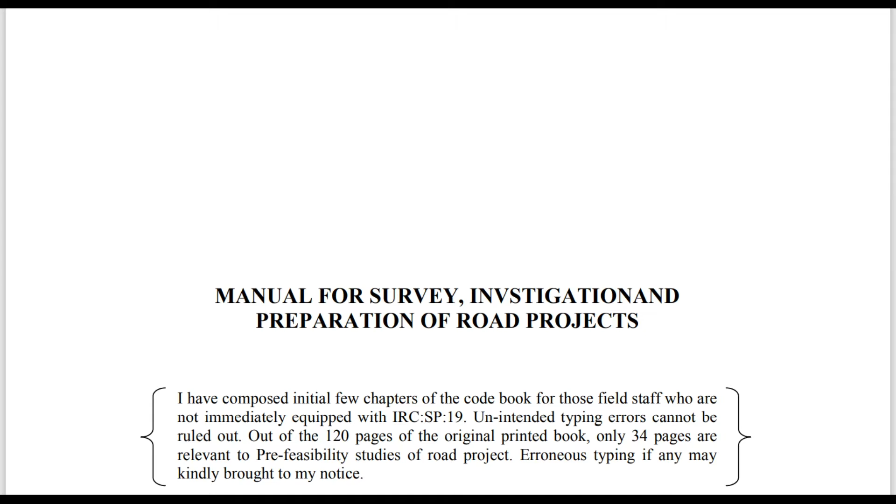तो आज हम बात करेंगे IRC SP 19 2001 एडिशन के बारे में। जैसे कि आप देख रहे हैं, ये IRC मैनुअल फॉर सर्वे, इन्वेस्टिगेशन एंड प्रिपरेशन फॉर रोड प्रोजेक्ट के बारे में बताएगा। बेसिकली जो प्रोजेक्ट रिपोर्ट्स थे उसके बारे में होगा ये। तो चलिए शुरू करते हैं।

इंट्रोडक्शन में 1.1 में बताया गया है कि हाईवे प्रोजेक्ट में क्या क्या इन्वॉल्व होता है। तो चेन ऑफ एक्टिविटीज, जो भी एक्टिविटीज जैसे एक्सकैवेशन या जो भी कंस्ट्रक्शन के लिए होंगे उसके बारे में होगा। फील्ड सर्वेज, अलाइनमेंट सेटिंग्स और ऑल दैट थिंग्स।

तो इंट्रोडक्शन में वैसे कुछ खास नहीं है देखने के लिए। 1.5 में आप देख सकते हैं कि इन्होंने मेंशन किया है IRC मैनुअल के बारे में, कुछ इनके जो भी चेयरमैन वगैरह सब आपको चाहिए तो आप 1.5 में पढ़ सकते हैं।

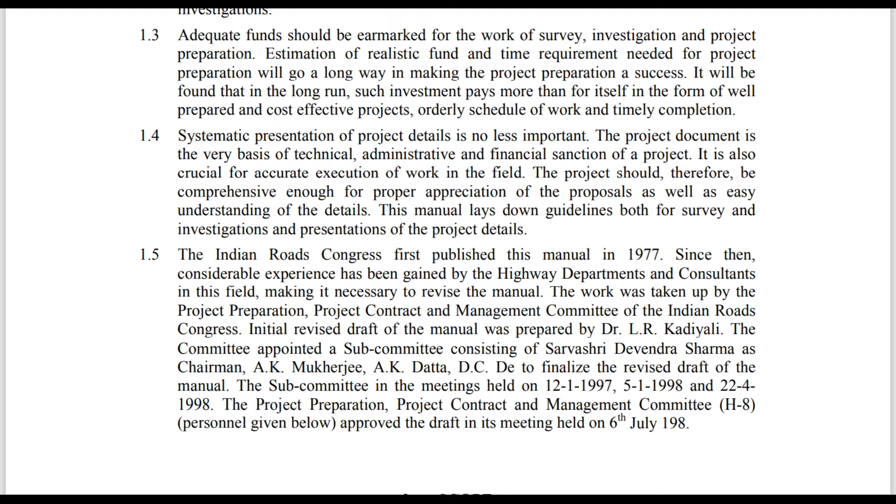सो हम डायरेक्टली बढ़ते हैं स्कोप की तरफ। स्कोप ये एक इम्पॉर्टेंट पॉइंट है, इसमें बताया है कि जो भी IRC मैनुअल SP19 है ये सिर्फ NH, SH और MDR के रूरल सेक्शन के लिए ही काम में आएगा। अगर आपको ODR या VR के लिए चाहिए तो आप IRC SP20 को रेफर कर सकते हैं।

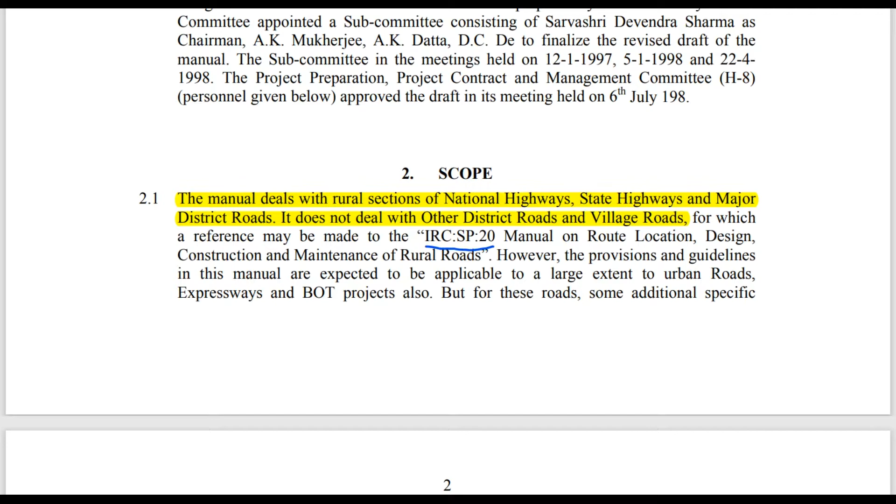Now I would like to share an interesting thing about the IRC. As you can see, IRC SP20 is written here, and similarly in the next slide you can see IRC SP54, IRC52. They have mentioned another reference IRC codes, because if someone is dealing with special conditions which are out of the scope of this current IRC, then they can definitely go through these IRCs mentioned as a reference and get details about it.

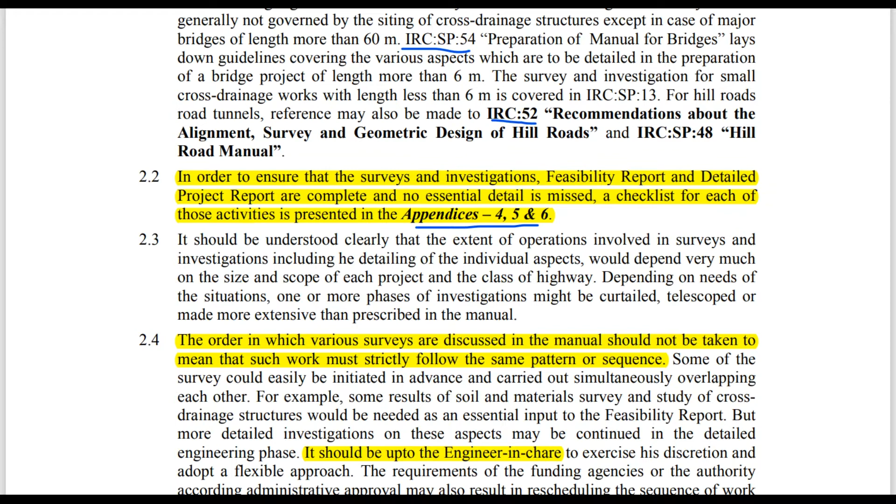In the next point, they have mentioned appendices 4, 5 and 6, which talk about the checklist for feasibility report and DPR. So now let's talk about point number 2.4.

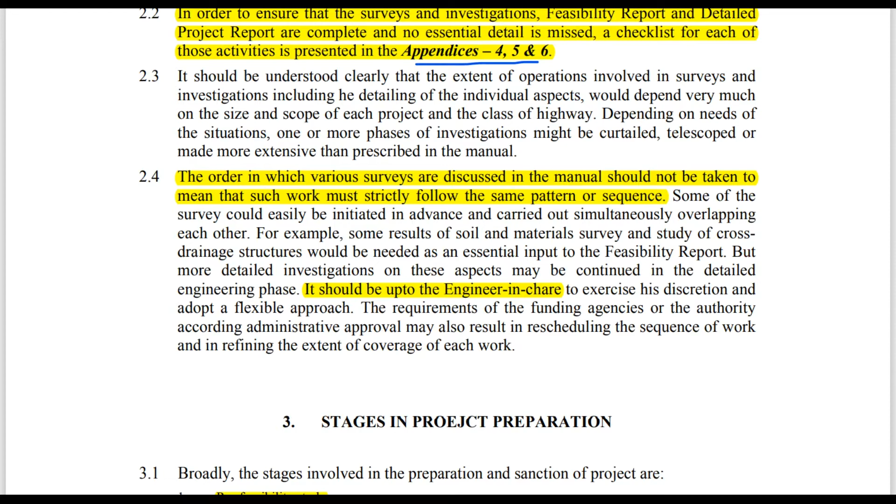In this they have mentioned that whatever the order of procedure they have mentioned, it is not compulsory that those will be followed in practice. It always depends on the engineer in charge, in which manner or sequence the order should be followed.

So now let's move to point number 3, which I must say is one of the important points, or the vital point in this IRC code. I will discuss this point in such a way that everything will be clear to you and you can definitely get all the points regarding this.

It includes 3 points: pre-feasibility study, feasibility study, and the detail engineering. We can say it is an important part of this code.

तो प्री फिजिबिलिटी स्टडी क्या होता है? तो जैसे हम कोई प्लान करते हैं कोई चीज़ करने का, तो व्हाट वी डू, व्हाट वी विल प्रायरली एनालाइज़ करते हैं कि व्हाट आर द आउटकम्स ऑफ दैट स्टडी, क्या गेन करेंगे उस प्रोजेक्ट से।

तो ये सब प्री फिजिबिलिटी स्टडी में होता है कि जैसे कि हमें इतनी कॉस्ट लगने वाली है ये रोड बिल्ड करने के लिए, तो वो कॉस्ट की अमाउंट जो हम टेंटेटिव सोचते हैं वो सब प्री फिजिबिलिटी स्टडी में आता है। तो ये इम्पोर्टेंट कब होगा?

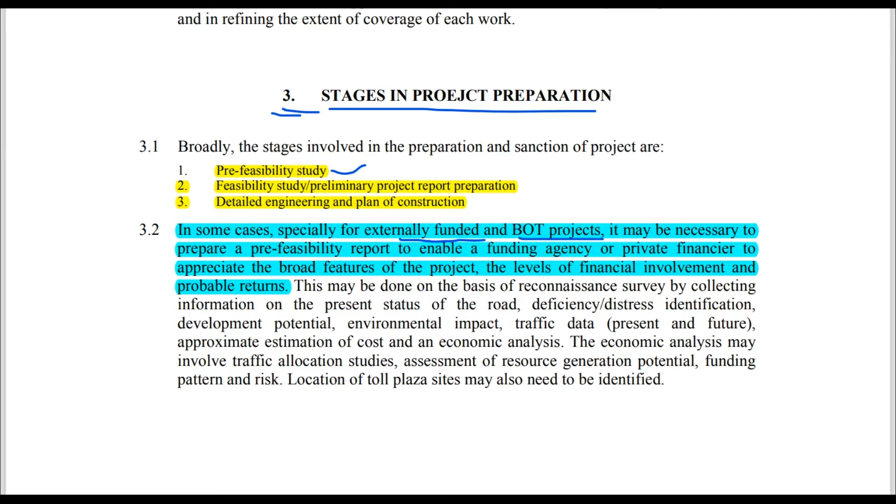जब आपको कोई एक्सटर्नली फंड करेगा या फिर BOT प्रोजेक्ट यानी कि बिल्ड ऑपरेट एंड ट्रांसफर प्रोजेक्ट में इसका ज़्यादा इम्पोर्टेंस रहेगा। So moving on to next point, the feasibility study।

In feasibility study, the proposal is acceptable in terms of soundness of engineering design. तो इसमें ये प्रोपोज़ल को थोड़ा इंजीनियरिंग तरीके से देखा जाएगा। फिजिबिलिटी स्टडी में जो भी इंजीनियरिंग डिज़ाइन है, टेक्निकल एस्पेक्ट्स पे ज़्यादा ध्यान दिया जाएगा।

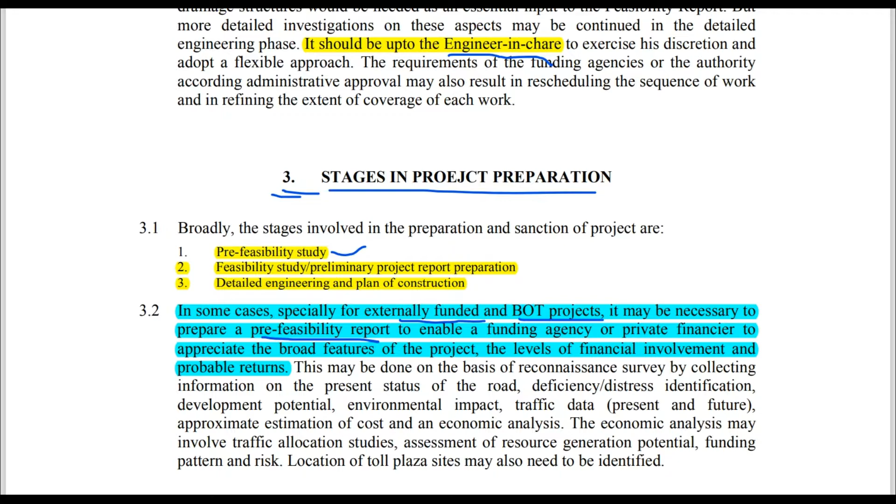और एट लास्ट आएगा कि आपका डिटेल जो भी DPR बनाएगा, डिटेल प्रोजेक्ट रिपोर्ट, तो ये आएगा आपके थर्ड पॉइंट में। जैसे मैंने यहाँ पे मेंशन किया है कि इन तीनों में स्टेप वाइज हम पढ़ेंगे ये।

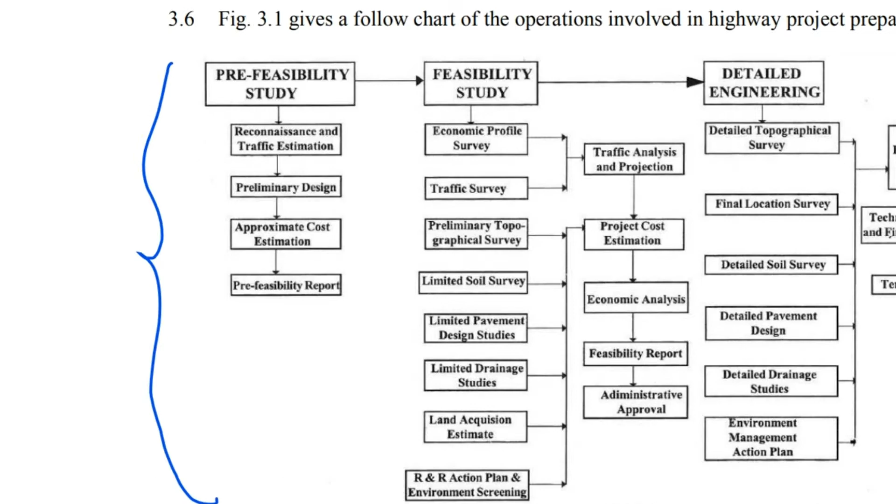तो चलिए बढ़ते हैं। ये एक फ्लो चार्ट रहेगा, ये एक समरी टाइप फ्लो चार्ट है जो स्टेजेस ऑफ प्रोजेक्ट प्रिपरेशन को शो कर रहा है। सो विल सी वन बाय वन। इन प्री फिजिबिलिटी स्टेज व्हाट कम्स अंडर दैट: reconnaissance and traffic estimation, preliminary design, approximate cost estimate, pre-feasibility report।

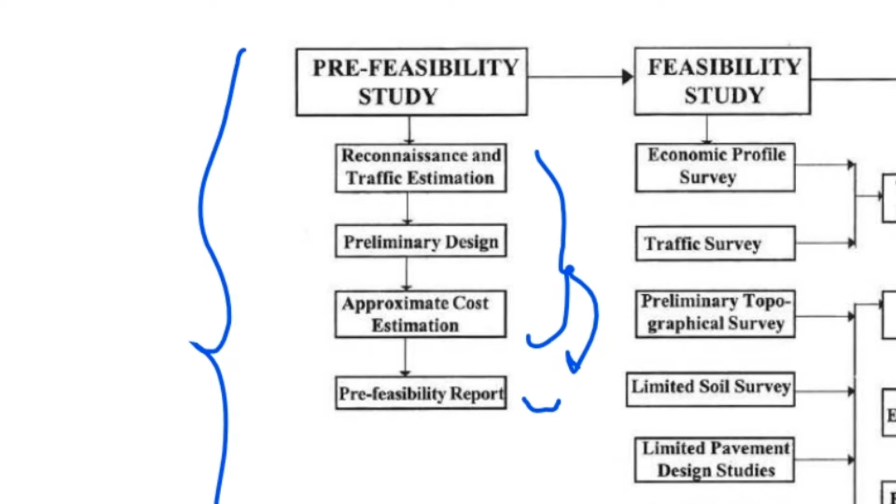तो ये प्री फिजिबिलिटी रिपोर्ट विल बी लाइक इंक्लूजन ऑफ ऑल दिस थ्री थिंग्स। तो हम 3.7 में इन्होंने लैंड एक्विजिशन दिया है जो कि यहाँ पे आएगा, बट विल स्टडी द प्री फिजिबिलिटी स्टडी प्रायरली टू द फिजिबिलिटी स्टडी। We'll cover all these 3 points first and then we'll move on to land acquisition.

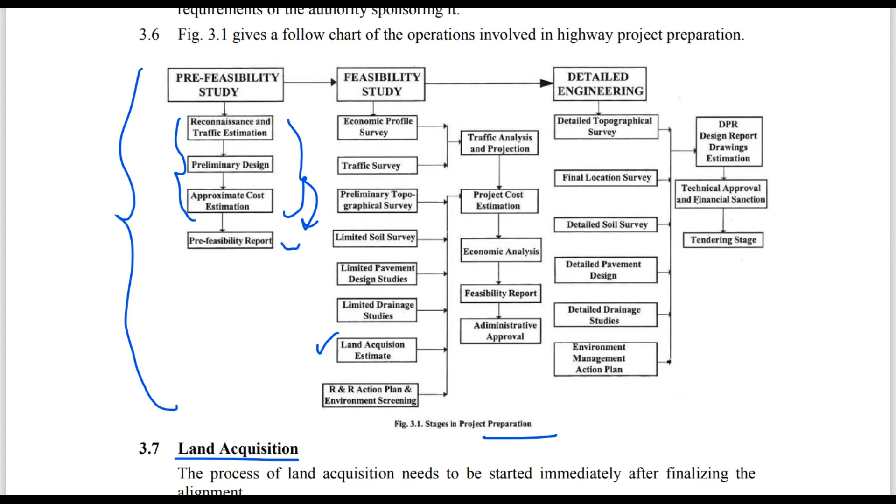So basically we'll jump to reconnaissance survey. Before that, how do you think the road constructions are done? डायरेक्टली मशीनरीज, इक्विपमेंट्स, लेबर्स लेके साइट पे पहुंच गए और शुरू कर दिए काम, ऐसा तो नहीं होगा। अरे भाई, साइट कैसे फाइनलाइज करोगे? अगर लैंड ही नहीं है तो क्या हवा में बनाओगे रोड?

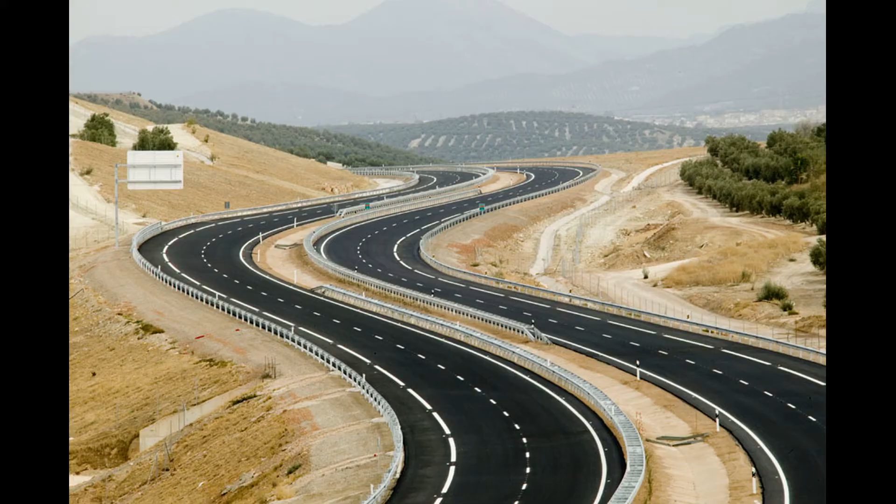इसी चीज के लिए तो ये रेकी सर्वे, जो भी रेकॉनेसेंस सर्वे है, इसका इस्तेमाल होता है टू हैव अ रफ आइडिया फ्रॉम वेयर द रोड शुड बी प्लान। Now let's move to the first point of the pre-feasibility study, which is the reconnaissance survey.

So in 7.1, the purpose is mentioned for this reconnaissance survey. The main objective of reconnaissance survey is to examine the general character of the area for determining the most feasible routes and for further more detailed investigations.

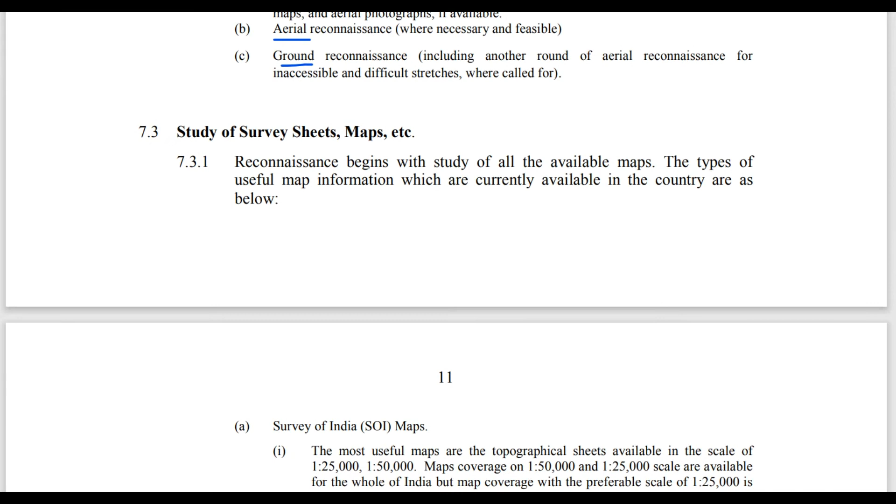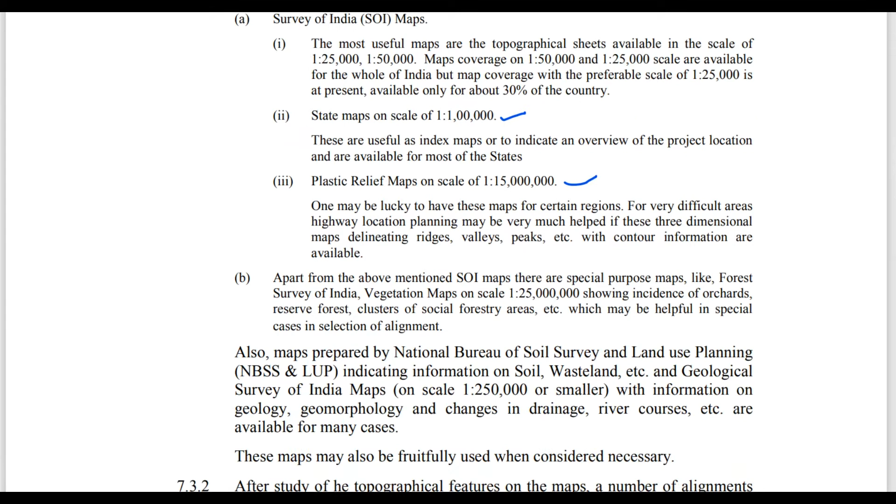So now we will move to 7.3.2, which is an important point. So what it says is, after the topographical features on the map, a number of alignments visible in a general way are selected keeping in view the following points.

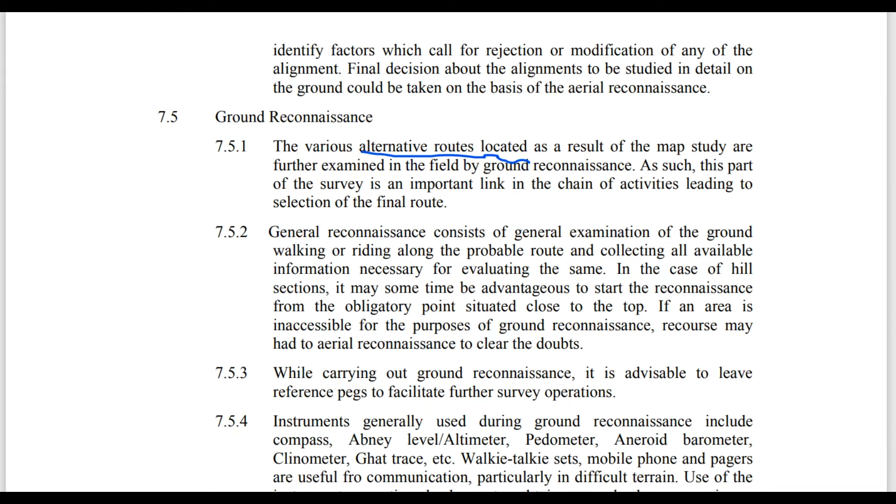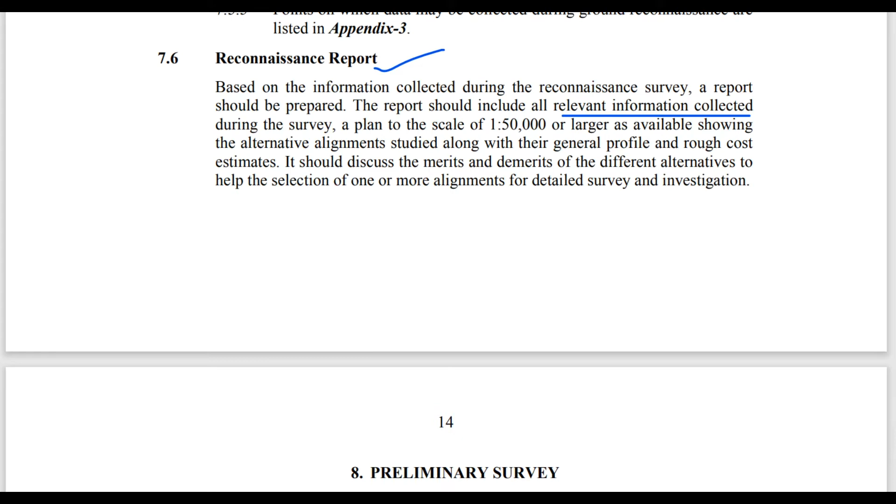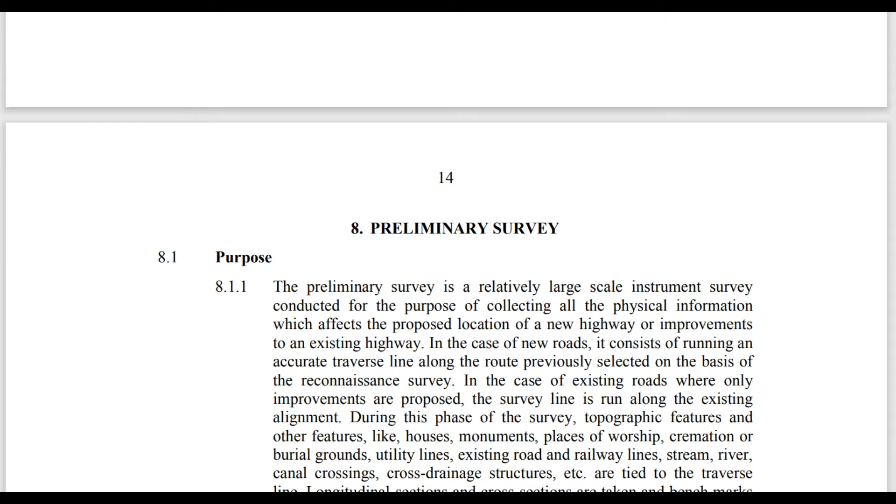Next, move on to the 8th point which is preliminary survey. In the pre-feasibility study, only after the reconnaissance point, the next point is preliminary survey. Point 1, what is the purpose of preliminary survey?

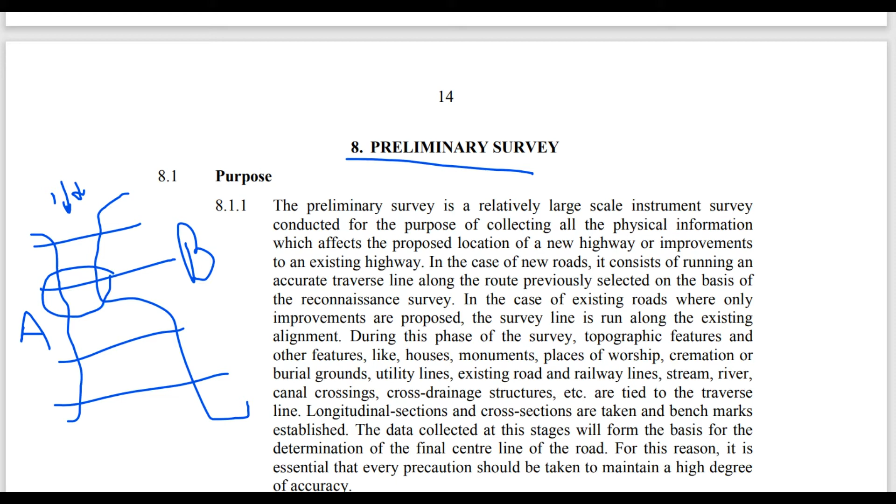This one, whether this or this or this. So some might say okay this one because it's the shortest, some might say yeah this one. So these things have to be studied under the preliminary survey.

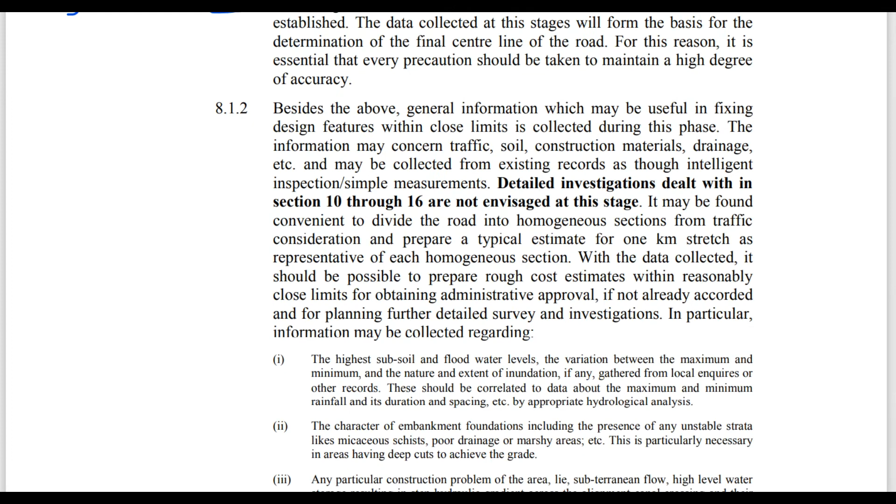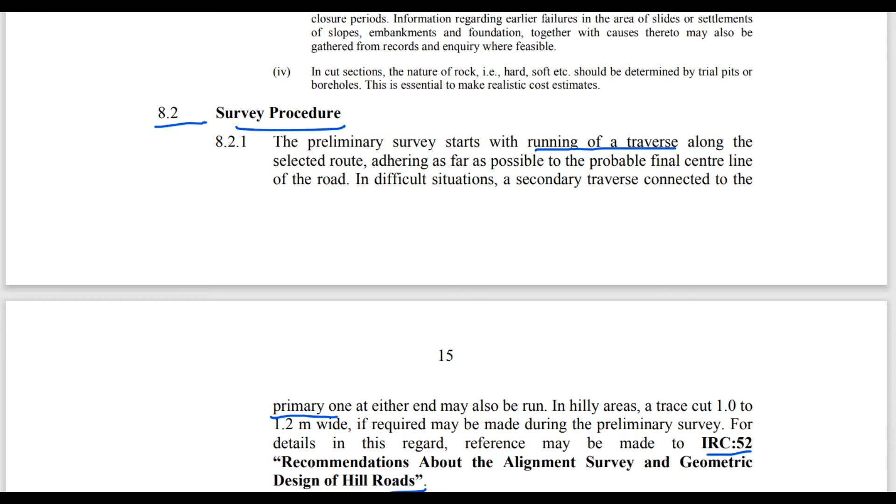Like I mentioned earlier, the IRC gives recommendations for special cases. So here also they have mentioned IRC 52 for the alignment for hilly roads.

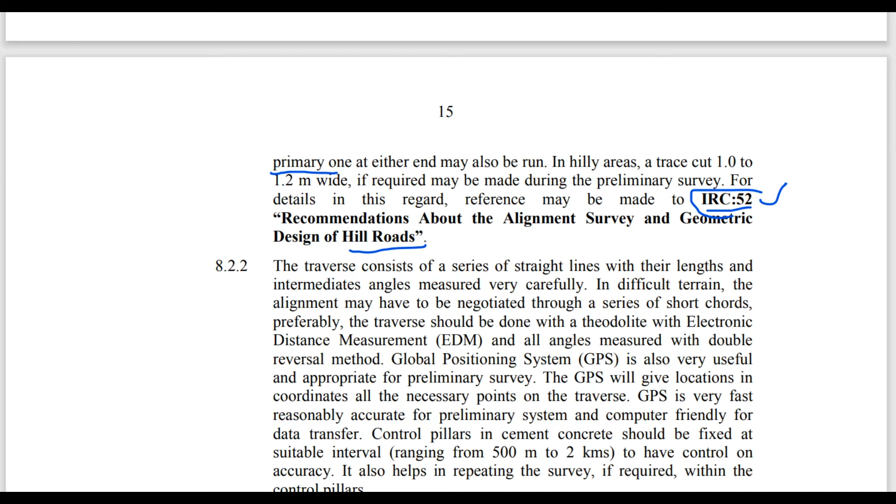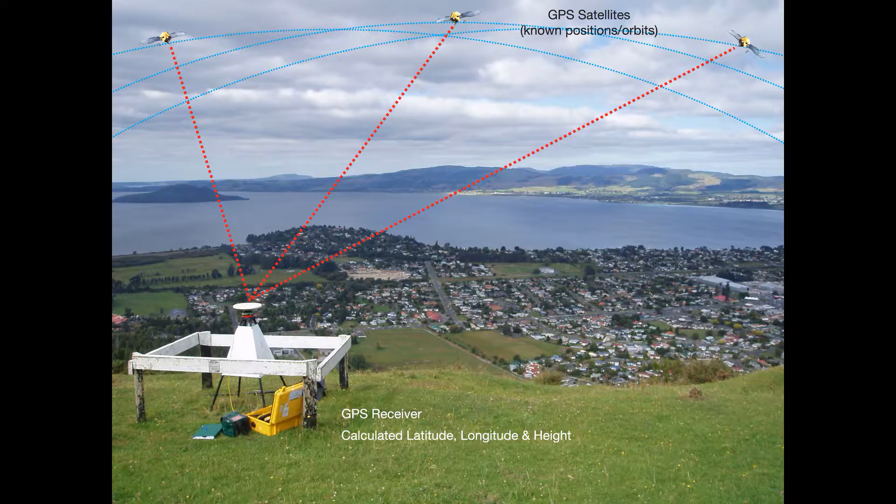In 8.2.2, they have mentioned the equipment that might be useful for doing the surveys, like EDM and GPS technology can also be used. They have also mentioned the accuracy. I don't think these points are much important. We have a lot more to cover.

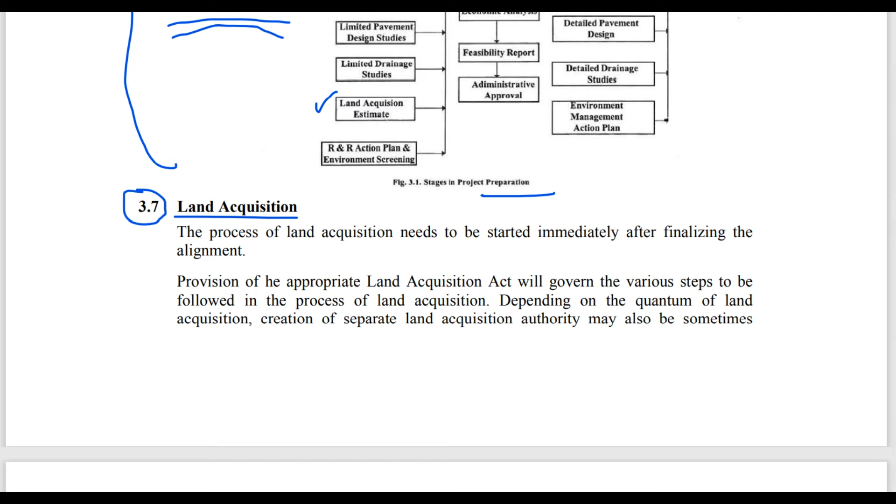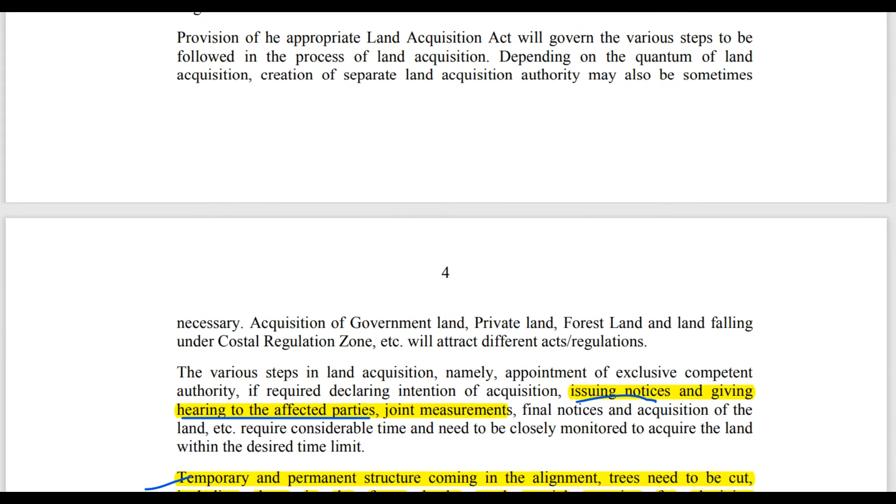So what comes under land acquisition is issuing notices and having meetings with the landowners so that all things get sorted out and our project will progress.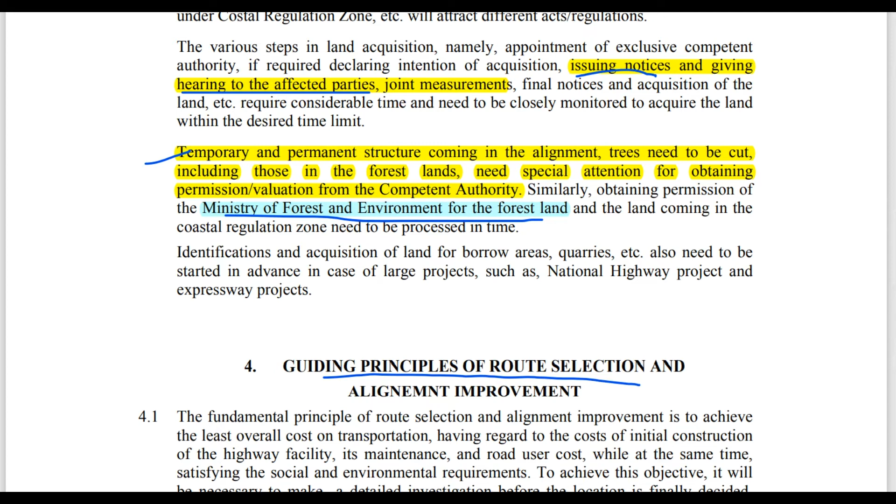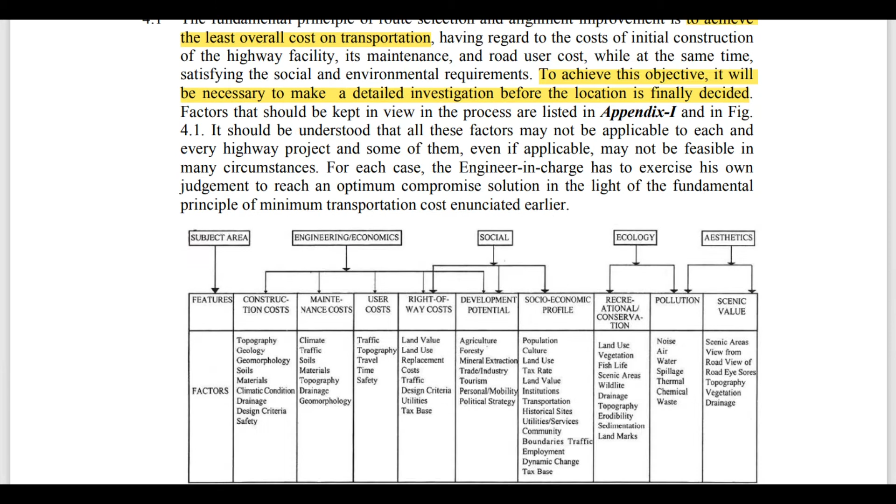The main motto of this is to reduce the cost of transportation or the construction cost associated with the project. To achieve this objective, it will be necessary to make a detailed investigation of each alignment prior to its finalization. So here in the flowchart, you can see the several factors they have mentioned, like engineering, social, ecological, and aesthetic factors that influence the route selection as well as the alignment improvement. This was about point 4.1.

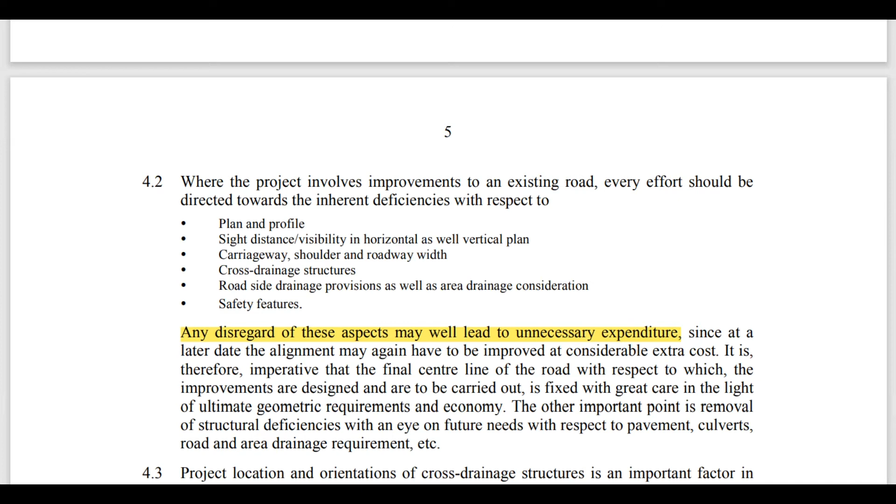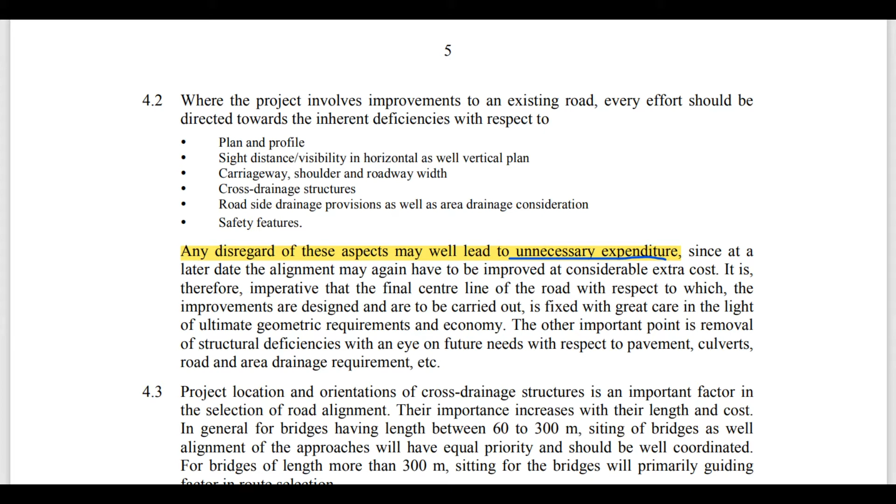In 4.2 they have mentioned where the improvement of the road is to be taken into consideration. For that they have mentioned several points: the plan and profile, sight distance, CD works, carriageway, shoulders, safety features. These are all the points where if a deficiency is found then we must think about road improvements, and if not then it will lead to unnecessary expenditures that the road might require in the future. So we can say that it is the pre-planning or precautions that we need to take to avoid future expenditure.

So in 4.3 they have mentioned the bridges or the CD works. They have said that the bridge length or CD work locations are also important while the road alignment is being planned. And in the last point they have mentioned that the environmental impact of the road or whatever project is being proposed should also be taken into consideration. For example हम ऐसे directly जाके बोल नहीं सकते हाँ ये अच्छा पार्क है तो इसमें से रोड डाल दो, so this should not happen. So this is what point 4.4 says. Let's move to the fifth point.

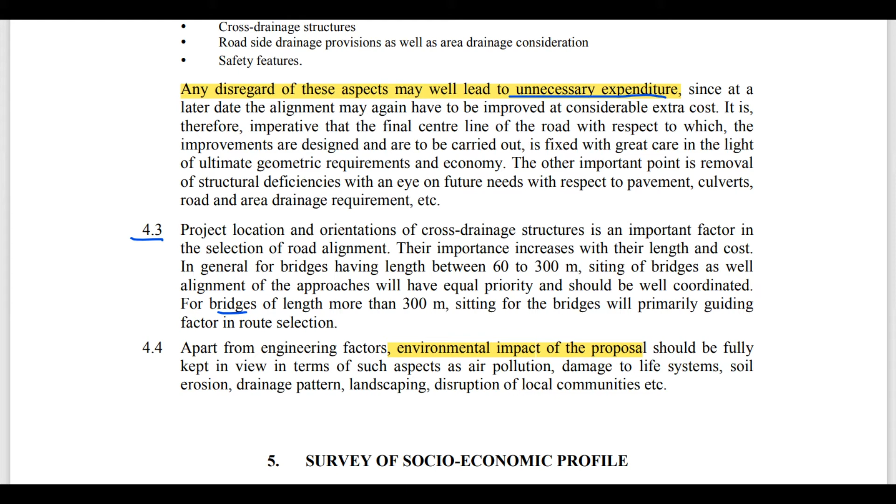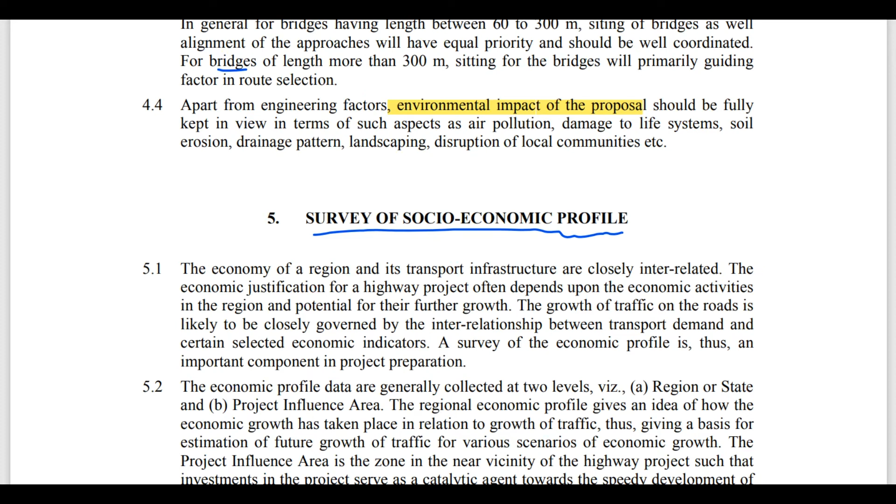It's about the survey of the socio-economic profile. Basically it doesn't relate to our project directly, but indirectly we must know the socio-economic profile of the surrounding areas through which the road is being proposed. So this fifth point gives the idea about what socio-economic information we must collect from the surrounding area. For example अगर हम ये रोड बनाएंगे तो करंटली टूरिज्म की क्या पोजीशन है, टूरिज्म बढ़ेगा या नहीं, तो इससे फायदे होंगे या नहीं. This has to be planned, so this point has been mentioned in the code.

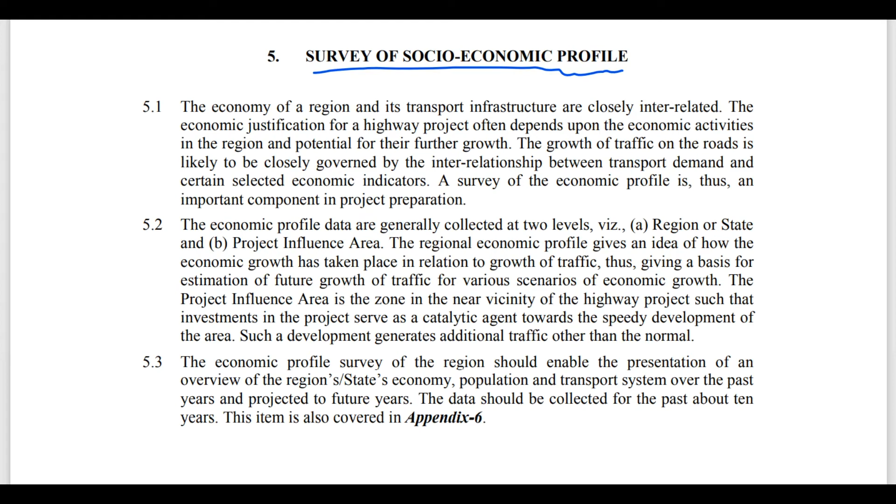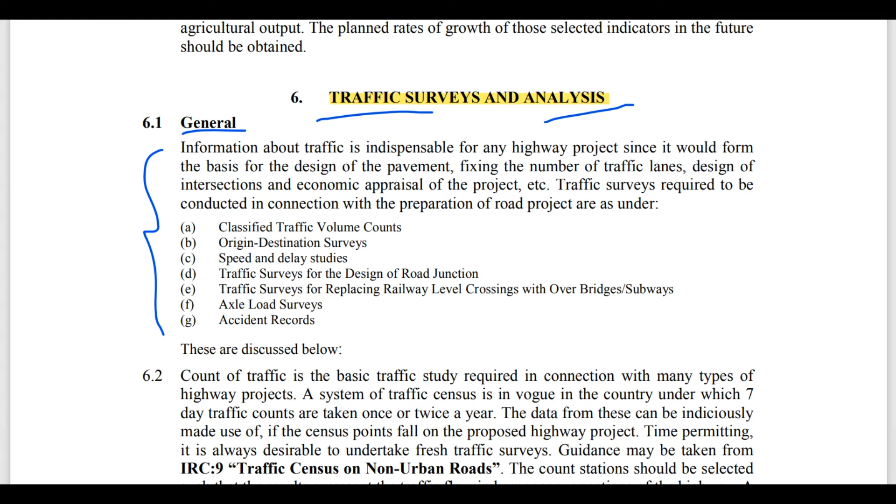In 6.2, they have mentioned regarding the traffic count. So they have said that the 7-day traffic count should be taken once or twice in a year, and they have also suggested that the guidelines from the IRC 9 traffic census on non-urban roads should be referred. When we discuss the IRC 9, we'll talk in detail about the average daily traffic and annual daily traffic.

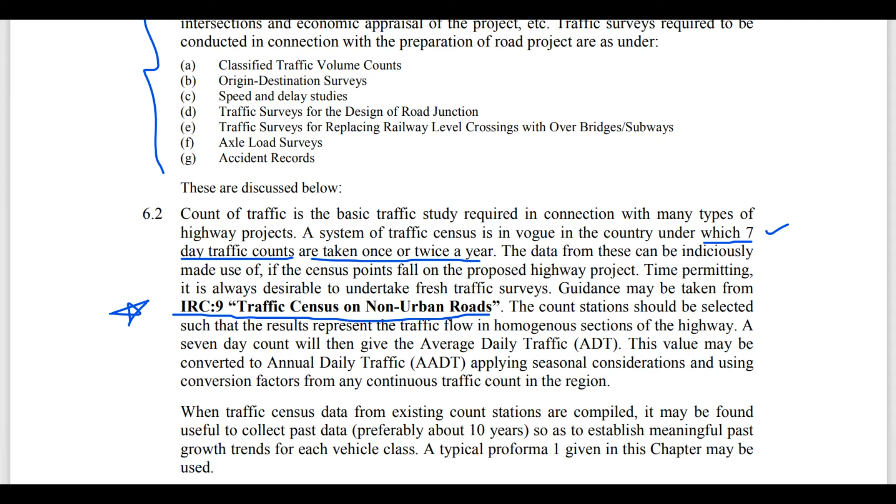So now let's move to the point 6.3, which says about the origin and destination surveys. For example, suppose this is a city and we need to design a bypass for this. So just taking the population from this city is not sufficient for the design of this road. There may be surrounding cities like 1, 2 or 3. So the traffic from these all three cities should also be taken into consideration while planning this road. So that's why the origin and destination surveys are important for the design of road.

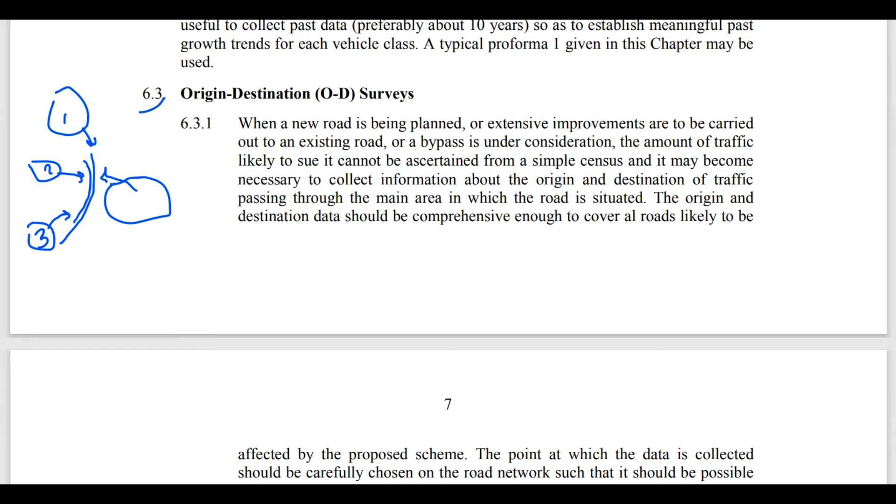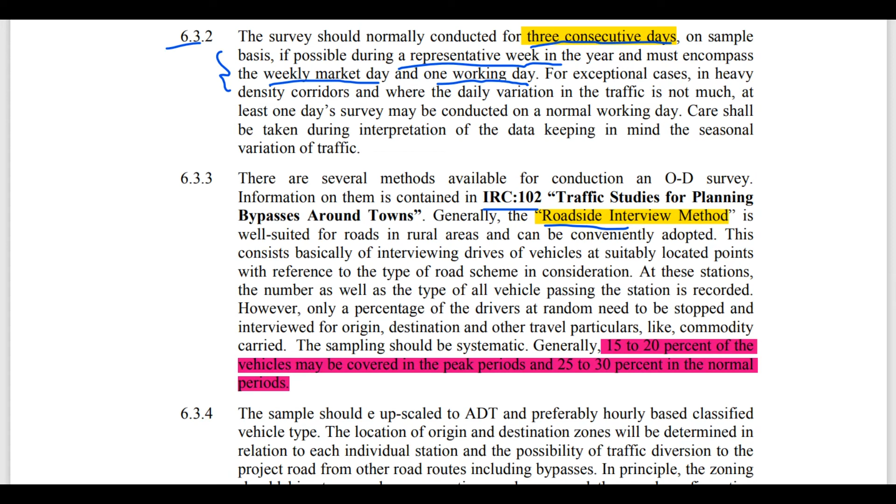Generally, OD survey is done for 3 days. The first day weekly market, second working day, and third will be the normal day. In section 6.3.3, they have mentioned the several methods for the OD survey, and those are also mentioned in IRC 102. Some of the methods that are used for the OD surveys are roadside interview method, license plate method, tag on car method. While studying the IRC 102, the traffic studies for planning bypass around the towns, we'll be having more focus on these methods of the road survey.

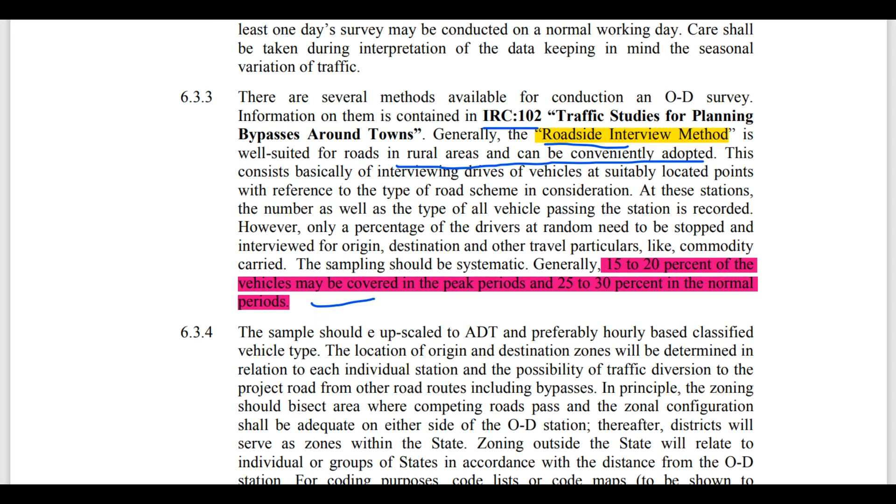Generally, 15 to 20% of the traffic on a peak period and 25 to 30% of the traffic on the normal period. This percent of the traffic is to be surveyed as per this code. The 6.3.4 will be briefly covered when we make a video on IRC 102 code.

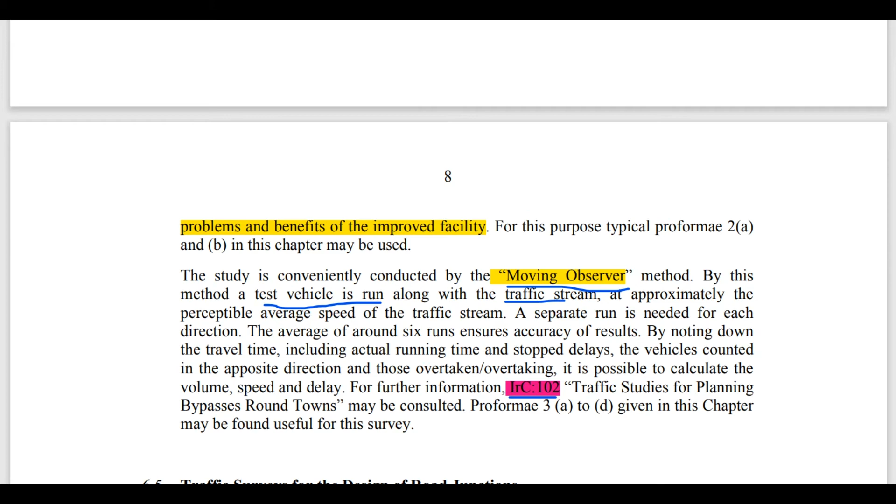So now we will directly jump to the 6.4, which talks about speed and delay studies. So the moving observer method is used in speed and delay studies. On average, 6 runs have to be taken for a certain vehicle, which is used as a test vehicle for the run along the traffic stream. By counting the number of overtaking and overtaken vehicles, we usually find the speed and delays for the particular vehicle. Similarly, IRC 102 has the guidelines regarding these sections.

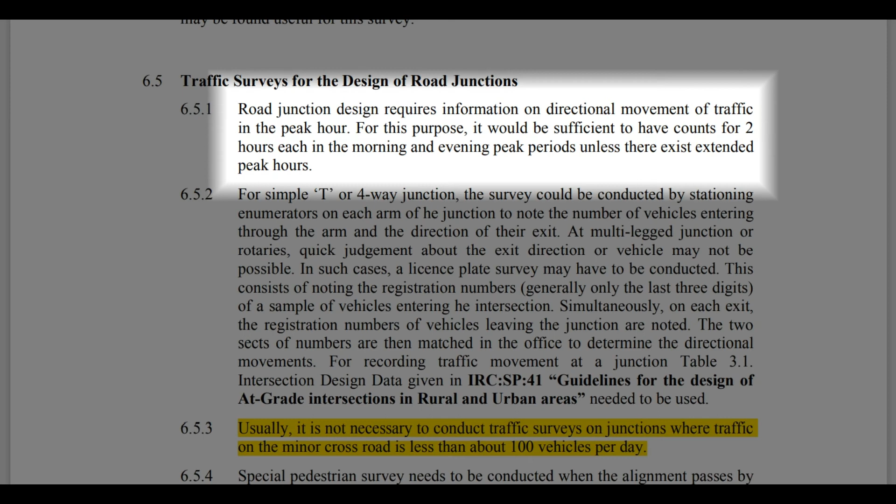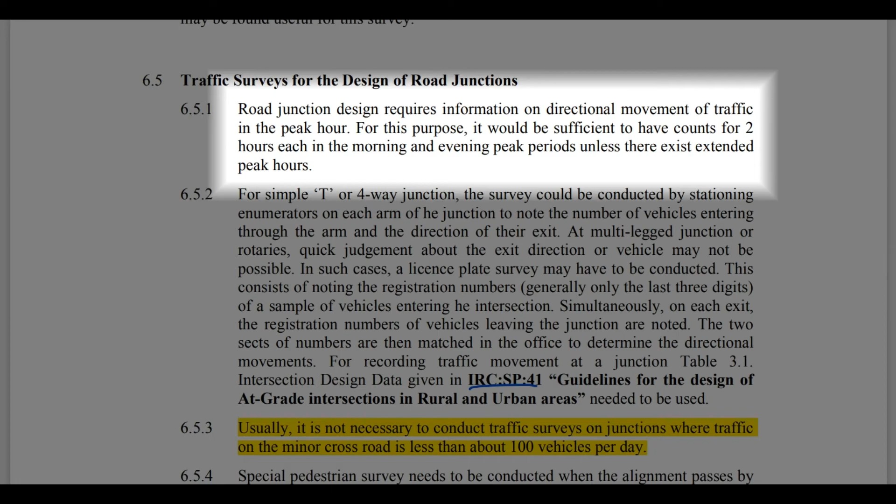Now let's move towards the next section 6.5, which talks about the traffic surveys for design of road junctions. So for the small junctions, manual counting on each arm of the intersections is to be done, and for the large junctions, the license plate method is used. For this, particularly 2 hours in the morning and 2 hours in the evening is the time for which the survey needs to be done, and the survey is to be done at the peak hours for the traffic. And if the traffic at the minor arm of the intersection is less than 100 CVPD, then this survey is to be skipped. And the rest of the guidelines can be seen in the IRC SP 41, and we will go through it in detail while reviewing that particular IRC.

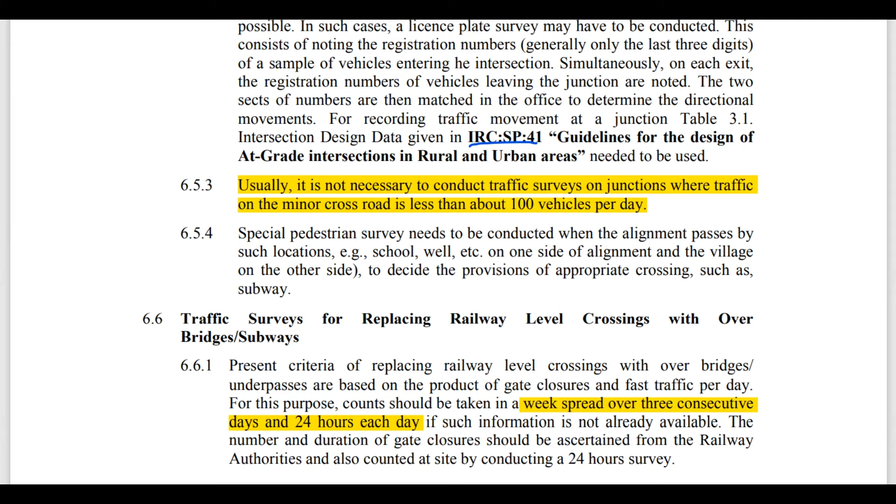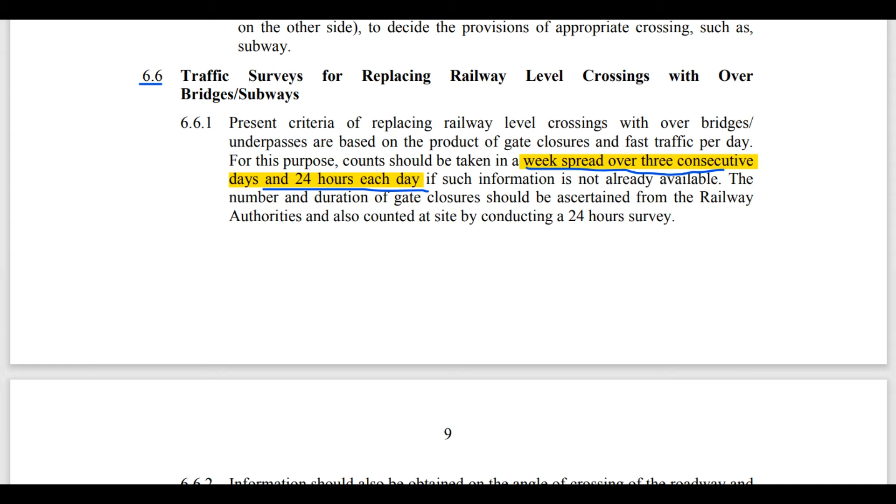Now let's move to the next section 6.6, which talks about replacing the railway level crossings with overbridges or subways. Actually, this came into picture due to the gate closure at the intersection of rails and the road. These things should be considered for the reduction of delays and increasing the speed of the traffic movements. In a week, 3 consecutive days, 24 hours each day, traffic surveys have to be done at the crossings. And the main thing that should be remembered is the angle of crossing of road and rail is mainly focused on and is tried to be kept perpendicular.

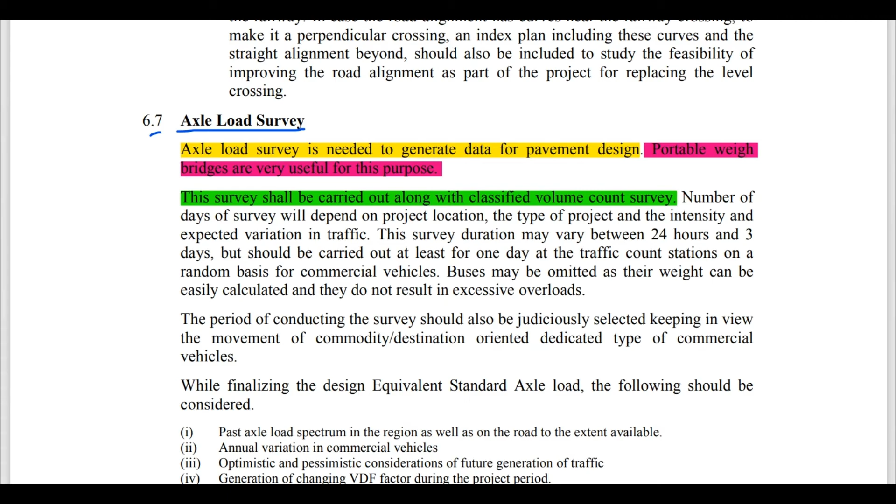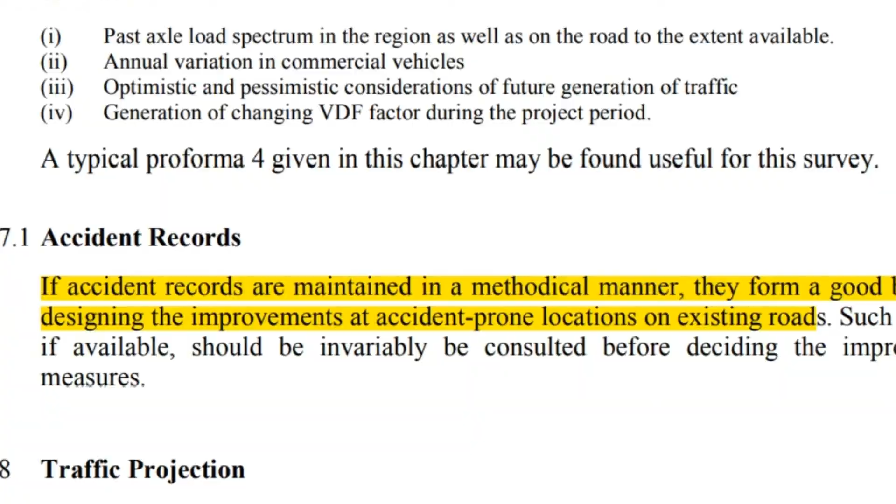Now let's move to the next section 6.7, which talks about the axle load survey. Basically, this axle load survey is done along with the traffic volume count itself. It is very useful for the pavement design. While considering this survey, the past axle load spectrum, if possible, annual variation of commercial vehicles, vehicle damage factors, and predicting growth of the future traffic, these all four things are to be considered for this survey.

Now let's move to the next section, which is 6.7.1, which talks about the accident records. Basically, this is important to find out the accident prone locations so that we can improve the conditions and we can try to reduce the accident rate for that particular stretch where the accidents occurring are frequent.

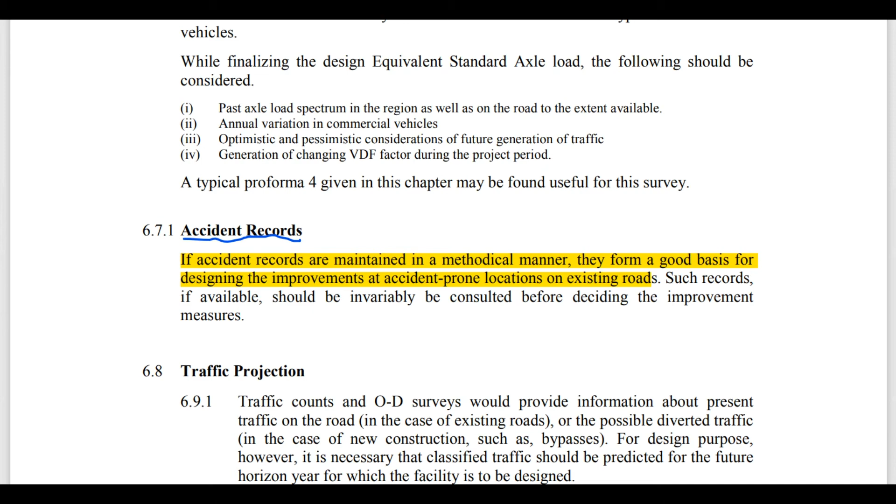So the next section is 6.8, which talks about the traffic projections. So basically, for the major truck routes, the desirable and minimum forecast period are 20 and 10 years respectively. This tells about the traffic count or the amount of traffic for which the roads need to be designed.

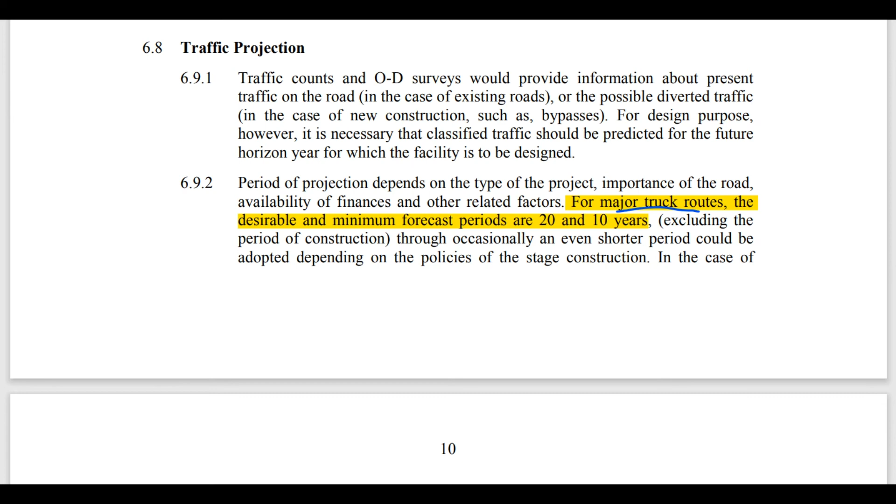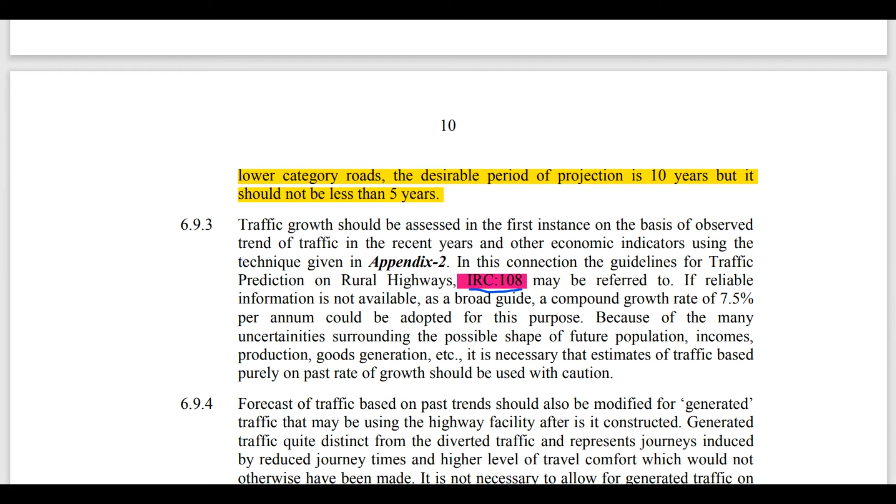That's why we need to consider the forecasted traffic for the road construction. And more details will be discussed by discussing the IRC 108, and generally the 7.5 growth rate is considered, and the rest of things are over. I think we have completed the

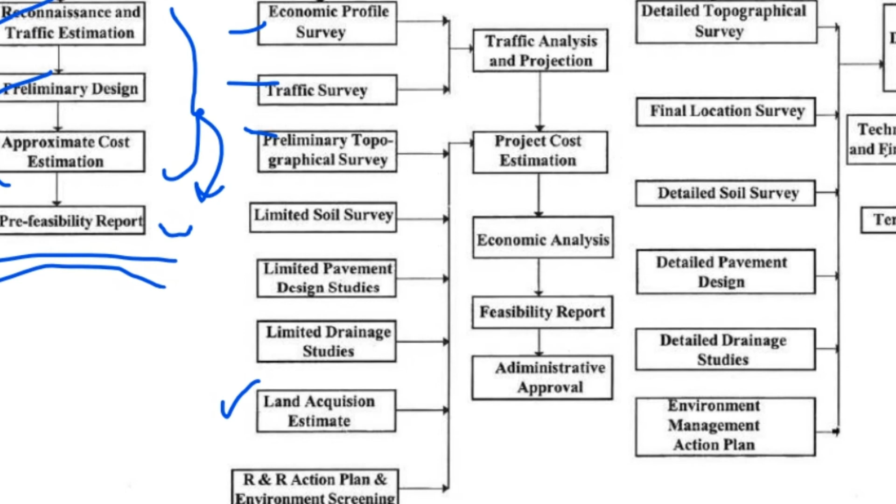reconnaissance survey at the pre-feasibility stage, so now we will directly jump back to the flow chart. So we have studied about the profile survey, traffic survey, preliminary topography. So we have skipped these two parts, limited soil survey and limited pavement design. So these studies we will be studying in the IRC 37 and 58 in detail.

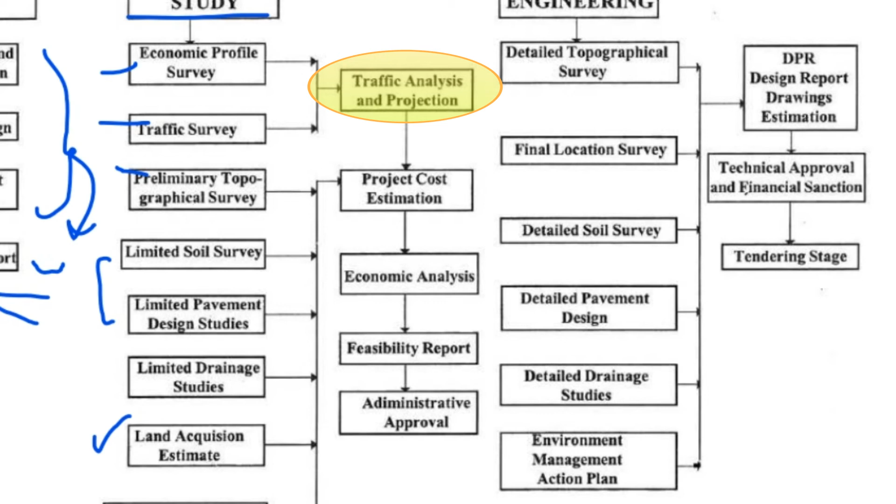So as you can see in the flow chart, the economic profile survey and the traffic survey combinedly give out the traffic analysis and the projection, while the other things in the feasibility studies like preliminary topographic survey, limited soil survey and all those will help to find the project cost. And once the traffic projection and the project cost estimation is done, then we go for the economic analysis.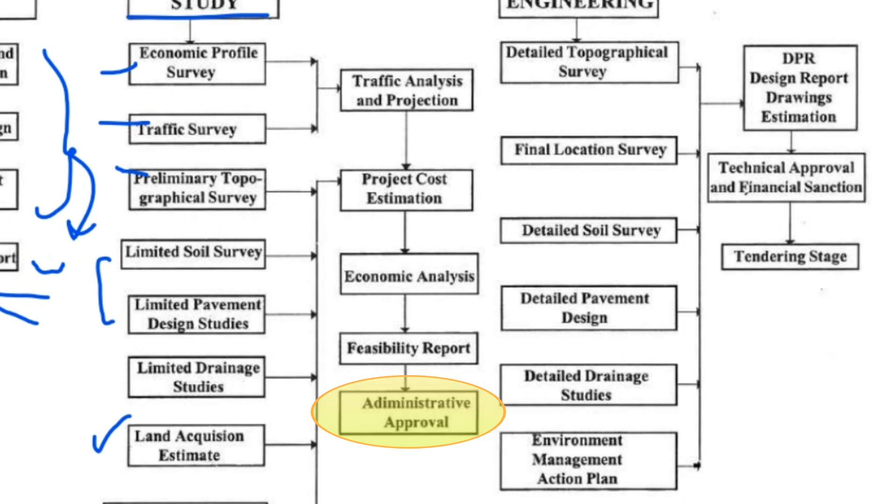In the economic analysis we will check whether the project will give the desired output to us or not, and we will make the feasibility report regarding it, and this feasibility report will be submitted for the administrative approval, and after that administrative approval we will proceed to make the detailed project report.

In the detail engineering, the first one is the detailed topographical survey. So basically in this survey we analyze the topography of the site. That means if there is any natural or man-made feature or a type of terrain, whether it is plain, hilly, or contours of the land. So using this kind of information we do the final location survey.

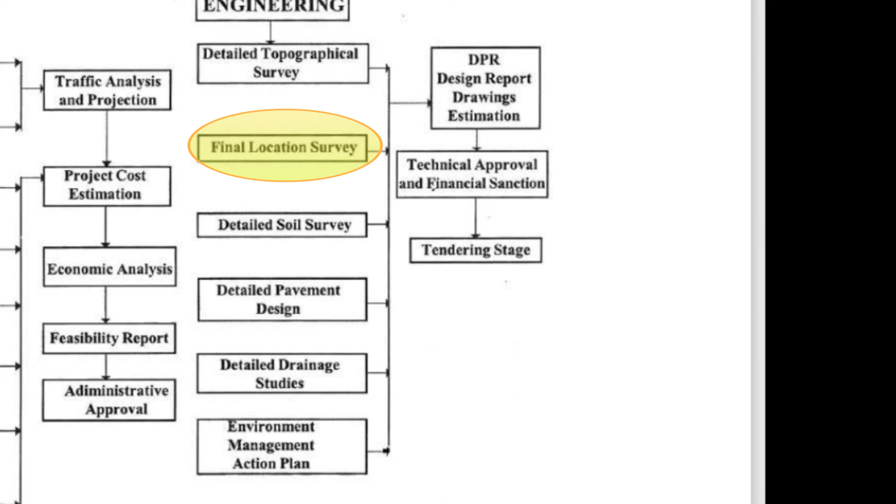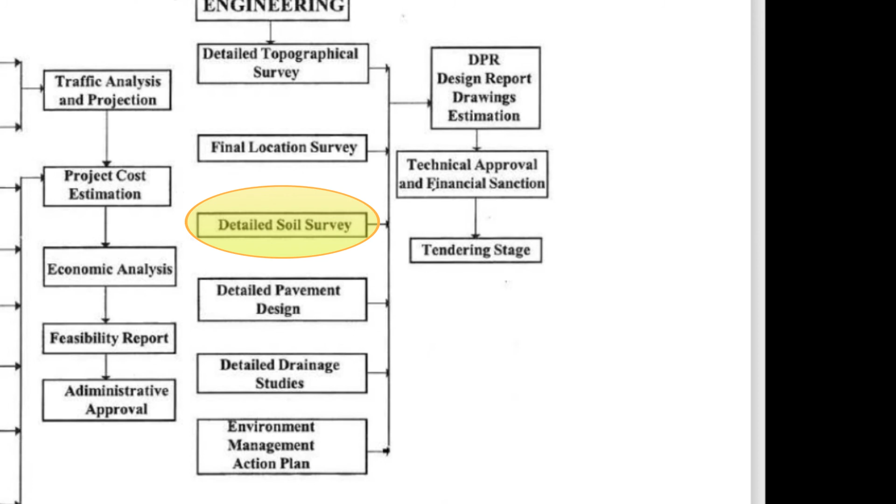So in final location survey we basically finalize the location of the road or any particular project that we want to construct, and after finalizing the location then we go for the detailed soil survey. So in detailed soil survey, using the geotechnical aspects we do the detailed investigation of the beneath strata so that we could easily find the strength of the soil. That is, by using a CBR test or any kind of test, we will find the strength of soil, and after that we'll go for the pavement design.

And basically there are different IRC codes for the pavement design. For example, 37 for the flexible and 58 for the rigid pavement. So when we talk about the IRC 37 or 58, then definitely we'll go for the detailed pavement design. And after the pavement design there are the detailed drainage studies. So what does this mean?

So this includes the study about any cross drainages or the bridges or any vented causeways, whatever structures are required for the easy passage of the water, so that the water will not cause any damage to our structure. So this all comes under the drainage studies. So definitely we will also take this in further videos.

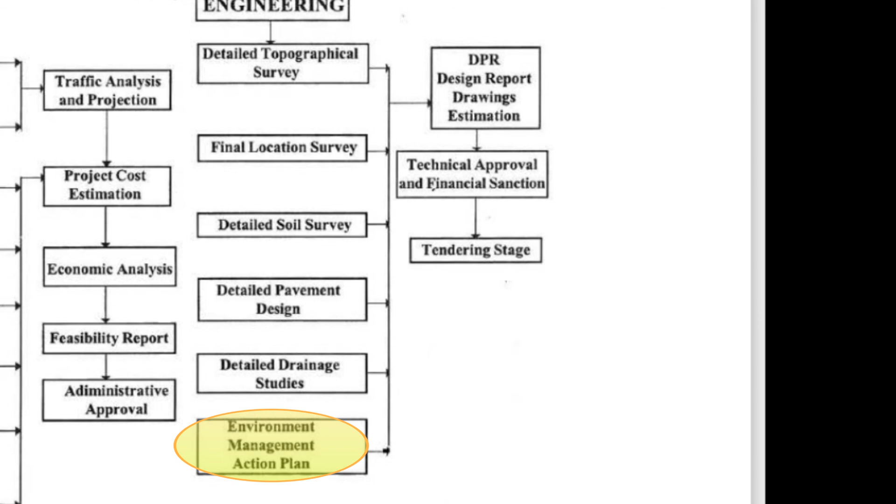And last but not the least is the environment management action plan. In this we deal with the environmental aspects. For example, the amount of energy required for the transportation of material or the fuel consumption, all those things will come. And nowadays this environment management action plan has gained so much importance, and therefore it is also very necessary, and detailed planning about this should be done.

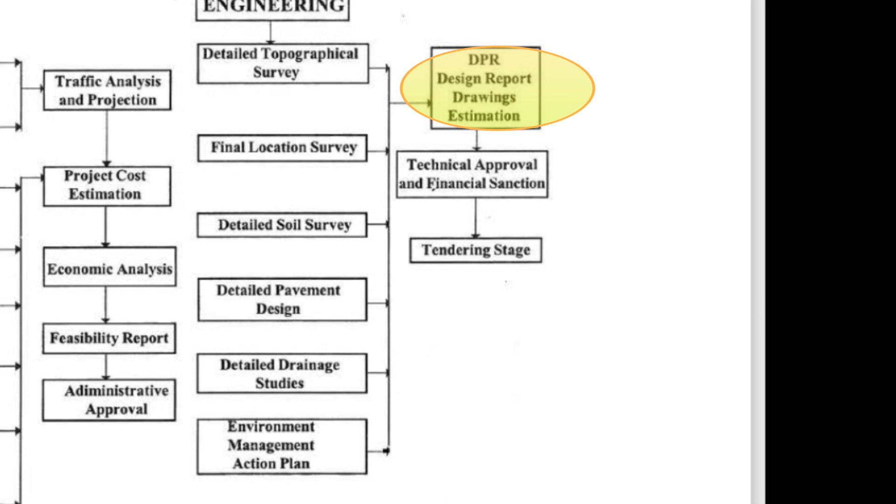So when we complete all these steps in the detail engineering, with the help of all these steps we will make the DPR, detailed project report, in which all the drawings, whatever study we have done, all should be mentioned. And with the help of DPR only we'll go for the technical sanctions and the financial sanctions.

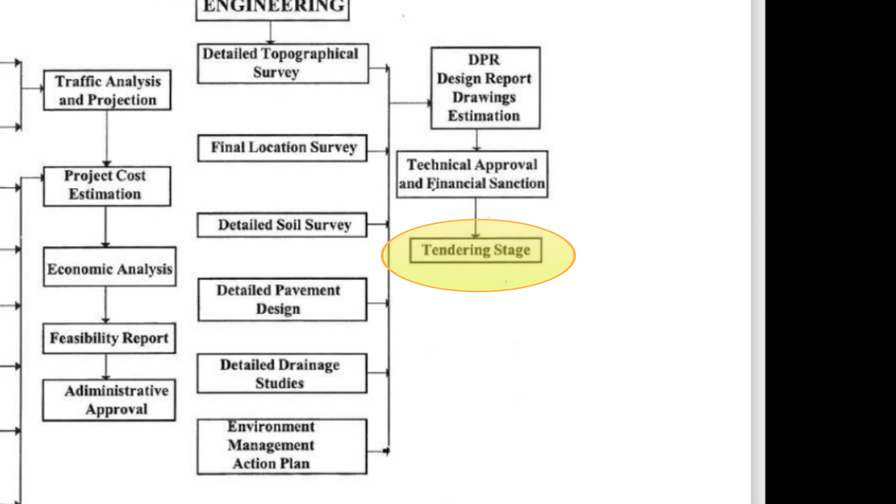So these sanctions are a must so that our project will come to the tendering stage. That means our project is technically approved and now the work of the project can be allotted to the contractor, and the construction or the execution part of the project will start. So I hope guys I have completed most of the things from this IRC SP19.